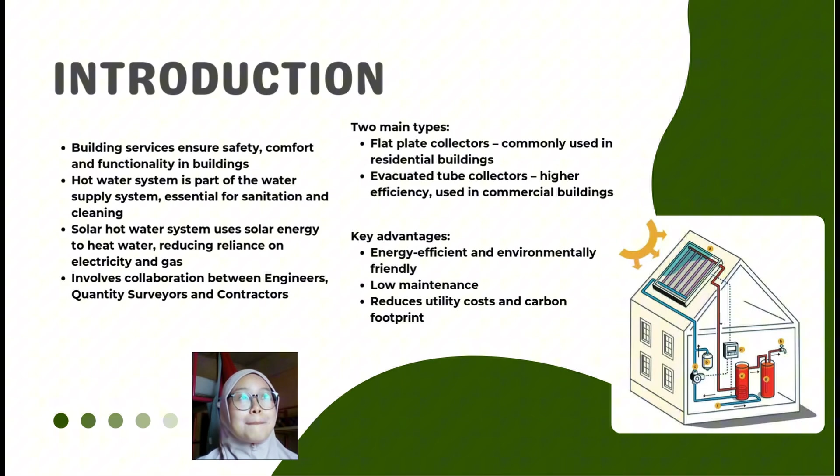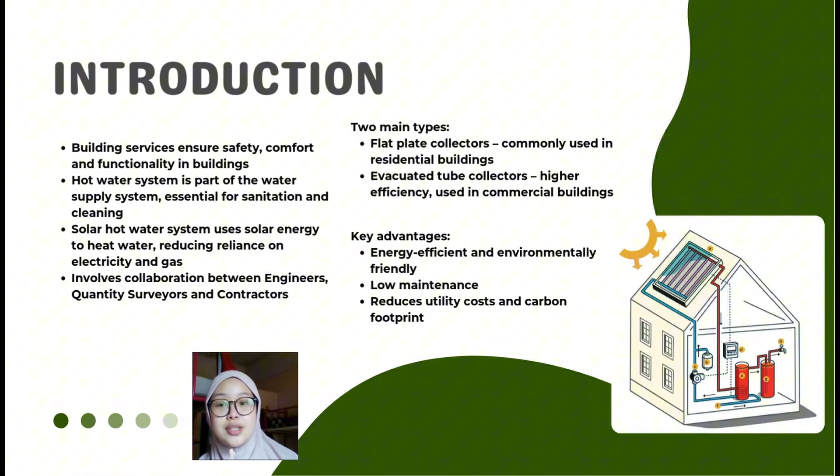And the advantages of solar hot water are undeniable, because it is a highly energy efficient and environmentally friendly solution that requires remarkably low maintenance compared to mechanical boilers. So by choosing solar, we are not just following a trend, but we are actively reducing utility costs and the carbon footprint of our project.

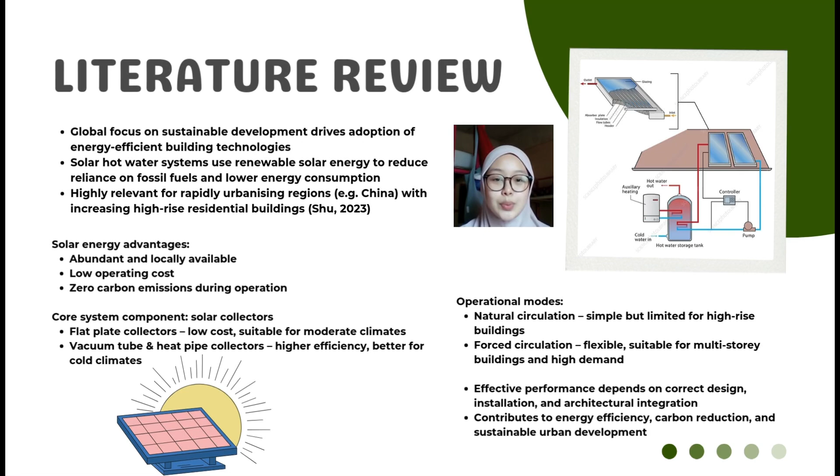Next is literature review. This literature review highlights the global focus on sustainable development, which has driven the adoption of energy efficient technologies in the building sector. Many studies emphasize the importance of reducing energy consumption and environmental impact through the use of renewable energy systems. The literature identifies solar hot water systems as an effective solution because they utilize renewable solar energy to reduce reliance on fossil fuels and lower overall energy consumption.

This technology is considered highly relevant in rapidly urbanizing regions, particularly in countries such as China, where the number of high-rise residential buildings continues to increase. According to Shu 2023, solar hot water systems play an important role in improving energy efficiency in high-rise development.

Based on the literature, solar energy offers several advantages. It is abundant and locally available, has low operating costs, and produces zero carbon emission during operation. So these benefits make solar hot water systems environmentally sustainable and economically viable. The literature also highlights that the core component of the system is the solar collector.

Flat plate collectors are commonly used due to their low cost and suitability for moderate climates. However, vacuum tube and heat pipe collectors are reported to have higher efficiency and better performance in colder climates. In terms of system operation, the literature identifies natural circulation systems as simple but limited for high-rise buildings. Forced circulation systems are more flexible and widely recommended for multi-story buildings with high hot water demand.

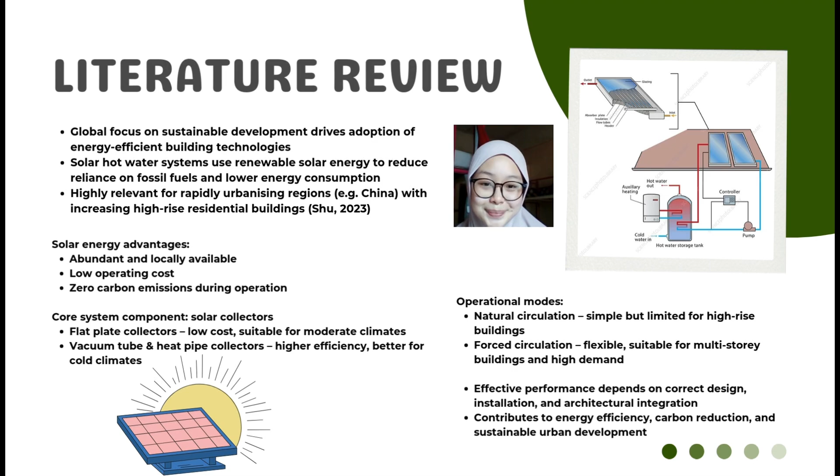Next, I will present the methodology of our project. The purpose of this study is to understand how the system works and to identify its advantages using information from previous studies. To achieve this, references from previous studies and existing reports were used to gather reliable information. This research mainly used a qualitative method.

One key reference is an article titled Project of Building Solar Hot Water by Shu Yugang, which discusses the design, components, and benefits of solar hot water systems, especially in reducing energy consumption in buildings. The qualitative approach was chosen because it provides detailed explanation and flexibility, allowing a deeper understanding of the system and its advantages.

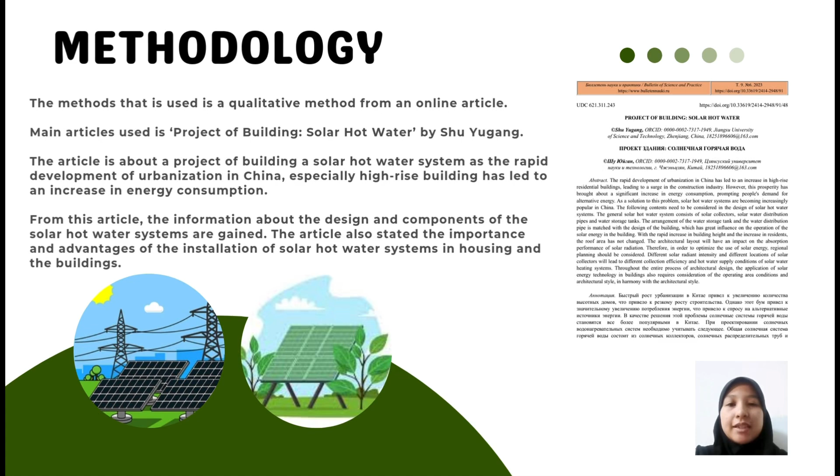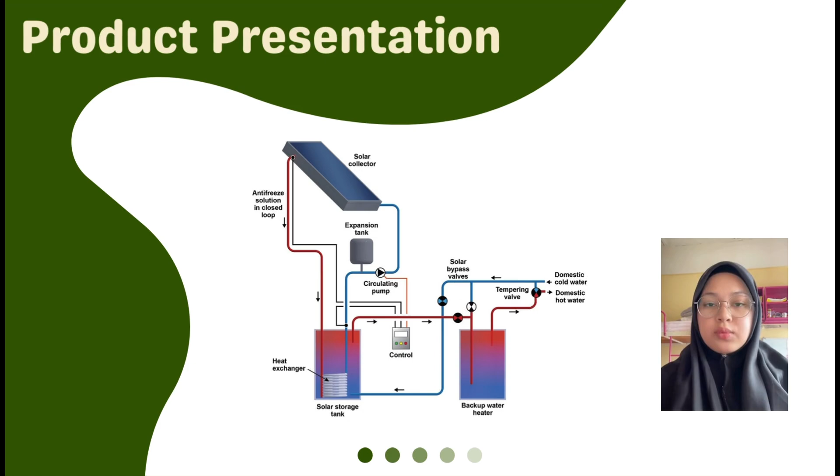Now I'm going to present the main components of a domestic solar hot water system. The system consists of a solar collector, a storage tank, and a circulation system, which work together to capture solar energy and supply hot water efficiently for household use.

Firstly, the solar collector is installed on the roof at an inclined angle to maximize exposure to solar radiation. Its main function is to absorb heat from the sun and transfer it to the working fluid within the system. Next, the storage tank stores the heated water and is well insulated to reduce heat loss. Hot water is drawn from the top of the tank while cool water enters from the bottom to maintain efficient circulation.

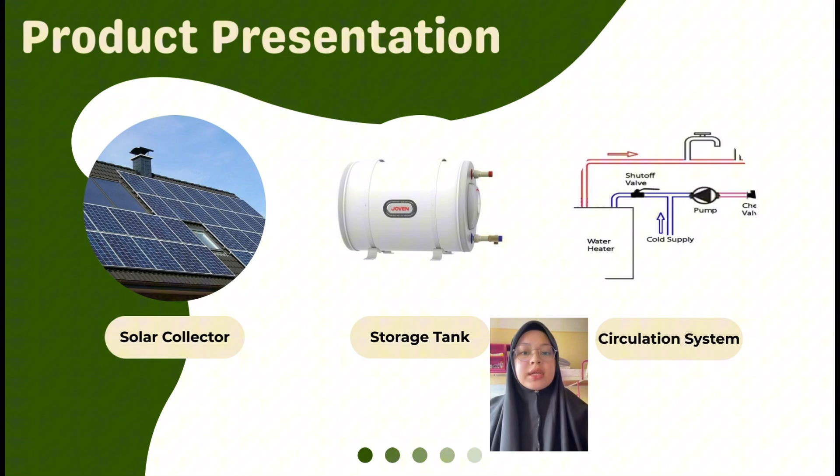The circulation system then allows water to flow between the collector and the storage tank. This can operate as an active system using a pump or as a passive system that relies on natural convection. The control and sensor unit monitors the temperature of the water in both the collector and the storage tank. When the temperature difference reaches the set level, the controller activates the circulation pump to ensure efficient heat transfer.

In addition, a backup heater is provided to maintain hot water supply during periods of low solar radiation, such as at night or on cloudy days. This ensures consistent performance and user comfort. Lastly, the piping and valves connect all system components and control the flow of water throughout the system. Heat-resistant pipes and safety devices such as temperature and pressure relief valves are used to ensure safe operation.

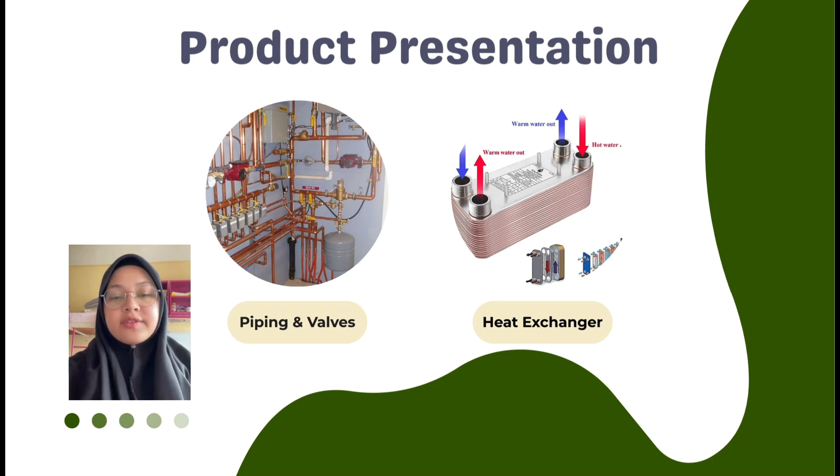For the indirect system, a heat exchanger is installed to transfer heat from the solar heated fluid to the domestic water without mixing the two. This improves efficiency while protecting water quality.

Due to building height, the system is divided into pressure zones to maintain stable water pressure and temperature across all floors. Safety and energy efficiency are ensured through the use of thermostatic mixing valves and pipe insulation. In the Malaysian construction industry, this system is widely applied in apartments, hotels, and hospitals, and is designed to comply with UBBL and JKR mechanical service guidelines.

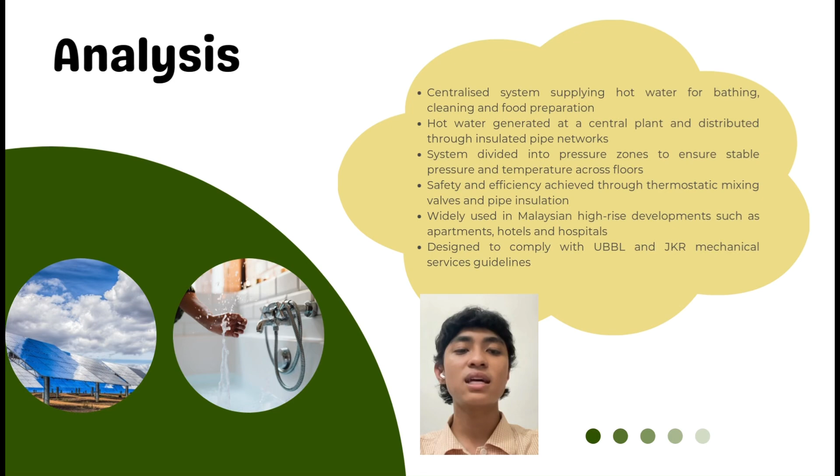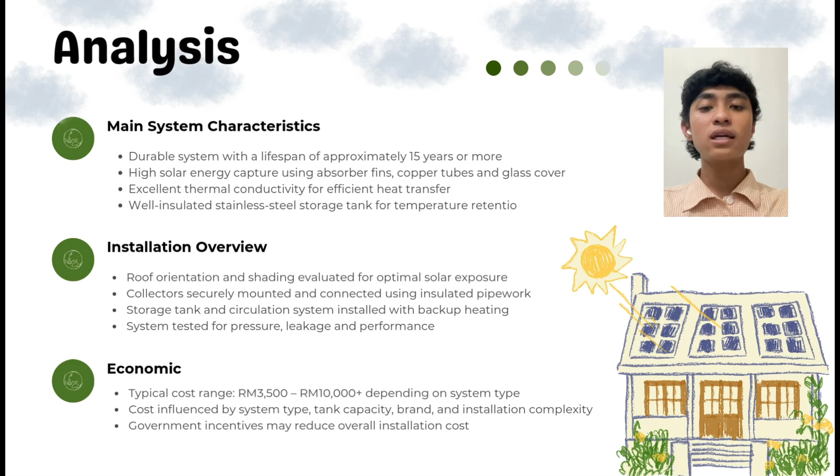This slide summarizes the key characteristics, installation process, and cost considerations of a solar hot water system. In terms of system characteristics, solar hot water systems are designed to be durable, with an expected lifespan of approximately 15 years or more when properly installed and maintained. Efficient solar energy collection is achieved through absorber fins, copper tubes, and a glass cover, while high thermal conductivity allows effective heat transfer. The system also includes a well-insulated stainless steel storage tank to maintain water temperature.

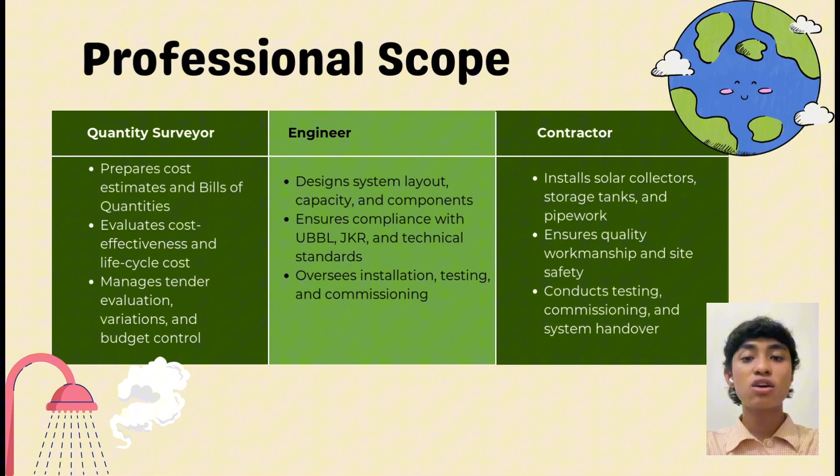Meanwhile, the contractor is responsible for the installation of the system on site, ensuring quality workmanship, safety compliance, and proper system handover. Together, these professionals ensure that the solar water system is cost effective, technically reliable, and performs efficiently throughout its service life.

To conclude, solar hot water systems represent an important and sustainable component of modern building services, especially for high-rise residential and commercial buildings with high hot water demand. This study has highlighted the fundamental principles, system components, and operational aspects of solar hot water systems, showing how they function as an integrated part of the building water supply network.

The analysis demonstrates that when properly designed, installed, and maintained, solar hot water systems can significantly reduce energy consumption, operating costs, and reliance on non-renewable energy sources. Therefore, correct system integration and management are essential to ensure consistent performance, user safety, and long-term sustainable benefits.